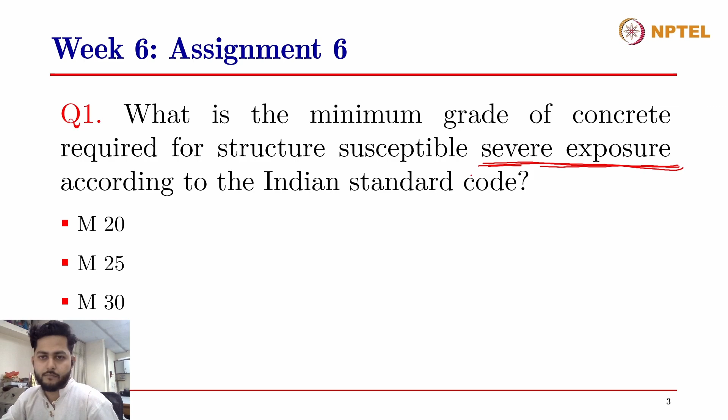Yes, does anyone of you know the answer to this question? All right, the correct answer to this question is M30 grade concrete.

This is table 5 of the Indian Standard IS 456 2000. Table 5 tells us about the minimum cement content, the maximum water to cement ratio, and minimum grade of concrete for different exposures of normal weight aggregates of 20 mm nominal maximum size. So 20 mm is the maximum size of aggregates allowed for the application of this table number 5.

And the exposure conditions are given from mild till extreme conditions. All these three parameters - the minimum cement content, maximum free water to cement ratio, and the minimum grade of concrete - have been listed out for plain concrete (PCC) and reinforced cement concrete (RCC).

And you can see that for severe exposure condition, the minimum grade of concrete for PCC is M20, and for structural concrete it has been mentioned as structure, so it is RC concrete, and that is M30 for severe exposure conditions. So the correct answer to this question is M30, right?

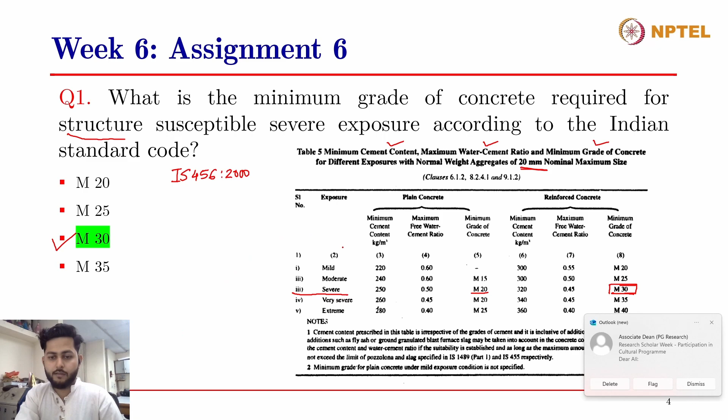Moving on to the second question. The second question goes: what is the target mean strength for M25 concrete as per the Indian standard? The standard deviation is given as 5 megapascals. So the grade of concrete is given.

Can you tell me what strength is mentioned in the grade of concrete? Which strength is mentioned as the grade of concrete? Yes, someone?

Divya, Vidya, do you want to answer this question? You need to calculate the target mean strength for M25 grade concrete, and the standard deviation is given as 5 megapascal.

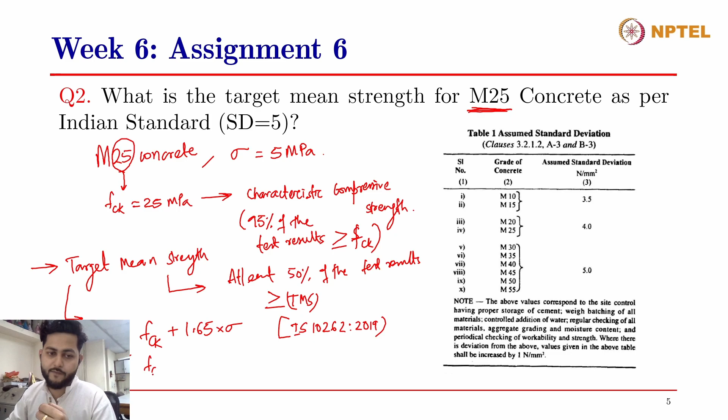In order to calculate the target mean strength, FC equals FCK plus 1.65 times sigma. This is as per the Indian Standard IS 10262 2019. So 10262 2009 had only the provision of 1.65 times sigma, but in the case of 10262 2019, it has been modified, and there are two ways of calculating this. One is by the standard deviation sigma, which I mentioned, and the other is by FCK plus X. X is a factor which takes into account both the standard deviation and the 1.65 factor as well.

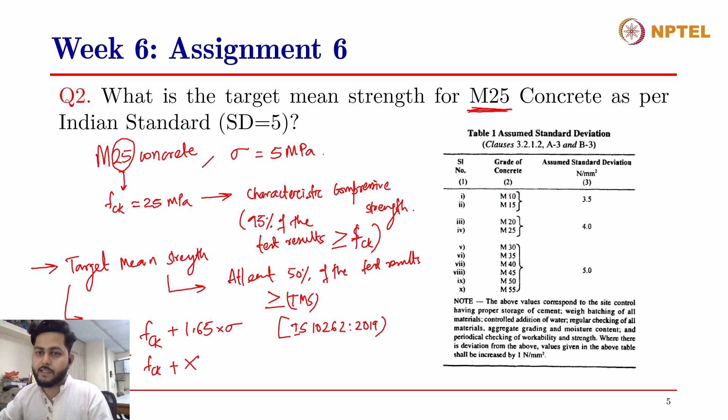So I have taken this table from 10262 2009, and here is the assumed standard deviation for different grades of concrete. Here it is mentioned that for M20 or M25 concrete, it is generally 4 megapascals, but in the given question, we have been given the sigma value as 5 megapascals. So we'll just go ahead with that.

So FC will be 25 plus 1.65 times 5, and the value will come out to be 33.25. The correct answer to this question is 33.25 megapascals. All right.

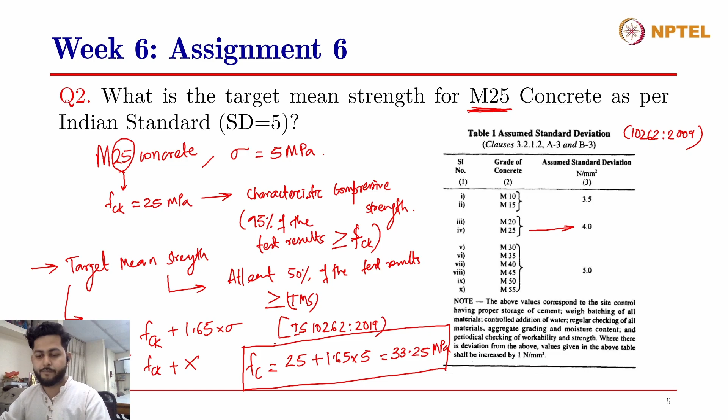Okay. Now for questions 3 to 6, you have been given a problem statement. The problem statement is: you have to design a concrete with 30% fly ash in cementitious material for a 28-day target mean strength of 35 megapascals.

The cement content, the water content, the fine aggregate content, and the coarse aggregate content for the control mix for the same 28-day target mean strength of 35 megapascals are given as 378 kgs, 200 kgs, 678 kgs, and 1155 kgs respectively. It is known that for the amount of fly ash mentioned, the water reduction is 15 kg per meter cube for the same workability.

We have also already studied this in the previous sessions. When we include fly ash in the mix, due to its spherical morphology, it produces a ball bearing effect, and therefore the workability is improved when we introduce fly ash in the mix. So, since the workability is improved, the other way to say it is for the same workability, we can reduce the water content. And therefore, it has been mentioned that for this 30% replacement of the cementitious material by fly ash, the water reduction can go up to 15 kgs per meter cube.

Assume a value of 0.3 for the K factor, and the reduction in wet density of concrete due to reduced water content and introduction of fly ash in the mix is 40 kgs per meter cube. So, with the introduction of fly ash and the reduction in water content, the whole bulk density or wet density, including the water, of the concrete after mixing is reduced by 40 kgs per meter cube. You have been given this data.

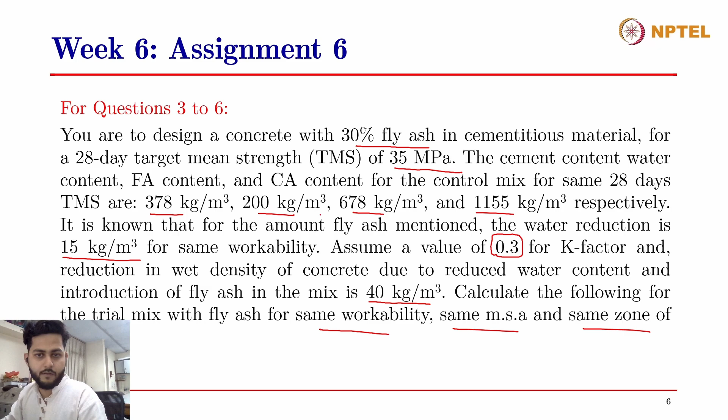I'll just write down the parameters. Till then, if you have the answer, just unmute yourself and speak. This is for the control mix. Cement is 378 kgs per meter cube. Water is 200 kgs per meter cube. Fine aggregate is 678 kgs per meter cube.

Coarse aggregate is 1155 kgs per meter cube.

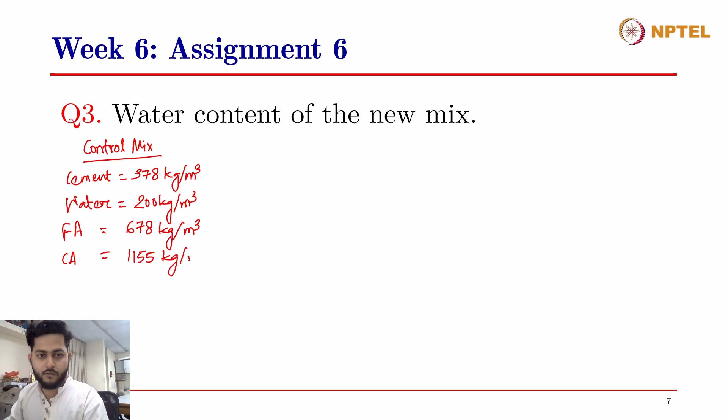Alright, and for the new mix, fly ash - I'm mentioning fly ash content as F dash equals 30% of cementitious material.

Water reduction is 15 kgs per meter cube. K factor is 0.3.

And reduction in wet density is 40 kgs per meter cube. Alright.

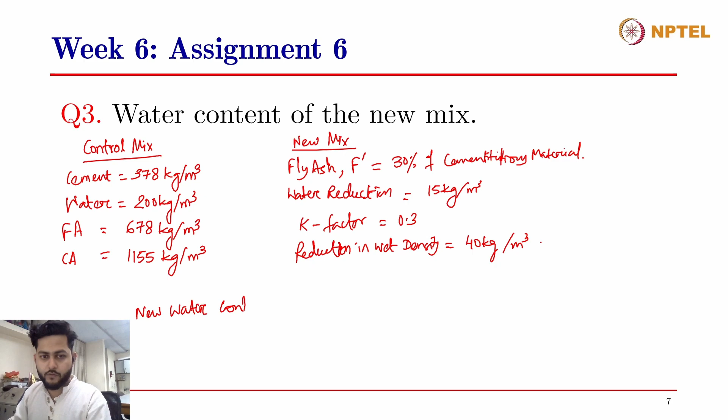Now the new water content is pretty straightforward. It is actually mentioned that due to the introduction of fly ash, we can reduce the water by 15 kgs. So W dash will be W minus 15 kgs per meter cube, so that will be 185 kg per meter cube. This is the first answer to this question - just have to reduce the water for the fly ash.

The second part of this question asks us the cement content of the new mix. How do we calculate it? We already know the water content, now we have to calculate the cement content. We know the fly ash content - it is 30% of the total cementitious material. And we know the cement content and the water content in the original mix. Now how do we calculate the cement content in the new mix?

For this part of the question, you have to focus on this term: same workability. You want to achieve the same workability in the original mix and the new mix. How do you calculate the cement content? Can somebody tell me the procedure to do it? How to proceed? We have been given this data set.

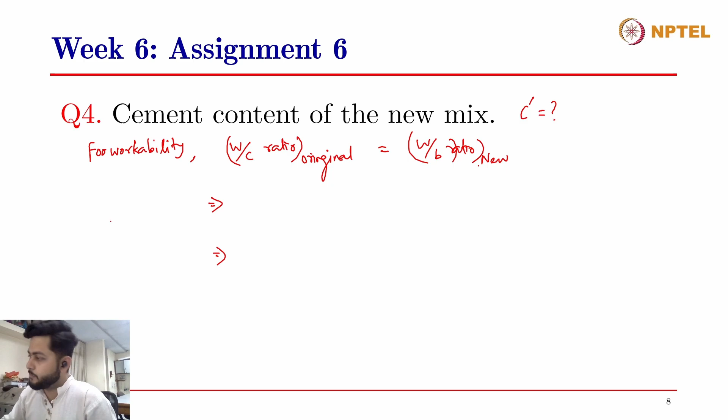So the water to cement ratio of the original mix can be equated with the effective water to binder ratio of the new mix. Now by effective, what I mean is this was 200 divided by 378 - we have to include the effective cementitious efficiency of the fly ash in this water to binder ratio. So W dash divided by C dash plus K times F dash, where K is the K factor, that is the effective cementitious efficiency of the fly ash, and this will vary from fly ash to fly ash.

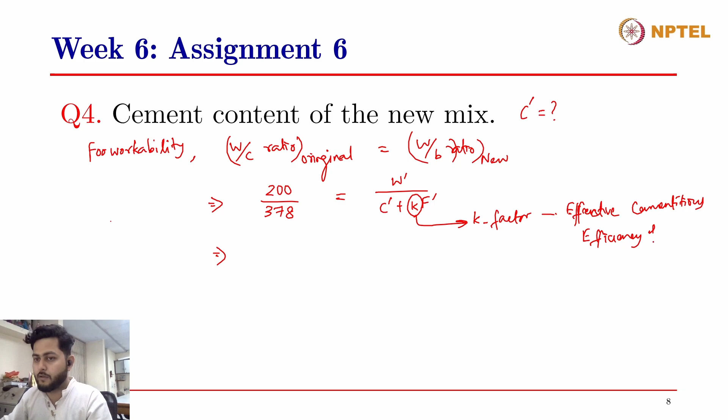And we have been given K as 0.3, and W dash equals 185 kgs per meter cube. We can substitute that in the equation, and then we find: C dash plus 0.3 F dash will give us 349.65. So that will be equation 1.

And equation 2 will come from the fly ash F dash content in the total cementitious material content. So F dash divided by C dash plus F dash equals 0.3 - 30% replacement in the total cementitious materials content. So that will give us 0.3 C dash minus 0.7 F dash equals 0. Now if I just divide all of it by 0.3, you'll get C dash minus 2.33 F dash equals 0. So this is equation 2.

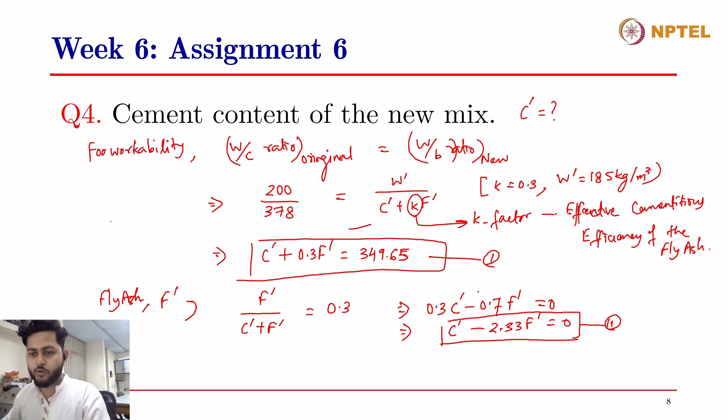Just move to the next - this question 4 was also related to this part, so I'm using this slide as well, because we have to calculate the fly ash content and the cement content. From these two equations, equation 1 and 2, we'll be able to calculate both the fly ash content and the cement content.

From equation 1 and 2, we can calculate as 0.3 F dash if we add both of the equations. Plus 2.33 F dash equals 349.65. From that, we can calculate F dash equals 132.94 kgs per meter cube, so we'll approximate it to 133 kgs per meter cube.

So fly ash content is this much in the mix. And since we know the fly ash content, we can put it in equation 2 and find out the total cement content. Cement content will be 2.33 times the fly ash content, which gives us 309.75 kgs per meter cube, approximated to 310 kgs per meter cube. So this is the cement content in the new mix.

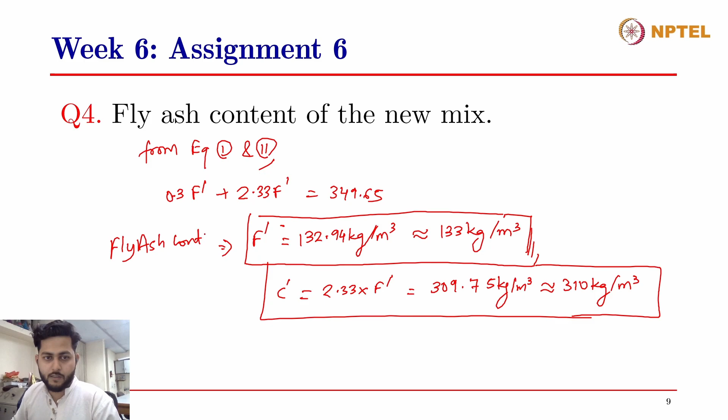I'll just mention it over here: fly ash content in new mix, and this is the cement content. 133 kgs per meter cube and 310 kgs per meter cube. Hope that is clear to you.

So for calculating the cement content and the fly ash content, you need to know that the workability is same.

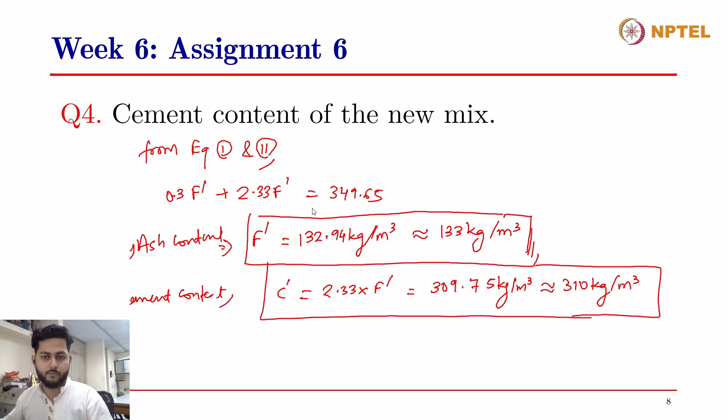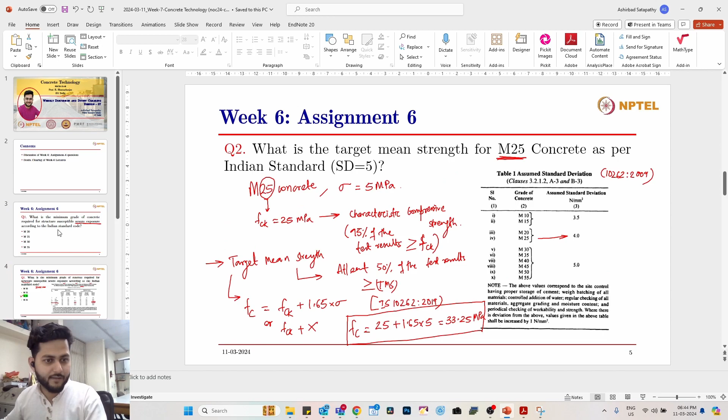Oh, did not get it. Somehow it did not erase properly. I guess, do we have it on here? No, none of it got written. Oh, I'll have to write it again then. I'm so sorry, this probably malfunctioned or something happened, and none of it is there on the slides.

This is question 4, this is 5, and this is question 6.

Okay, I'll just quickly write down everything again because we missed it. So for the same workability, water to cement ratio original can be equated with the water to binder ratio in the new mix, right? So that will be 200 divided by 378 equals water dash, which is the new water content, divided by C dash, which is the new cement content, plus K times, which is the K factor, F dash, right?

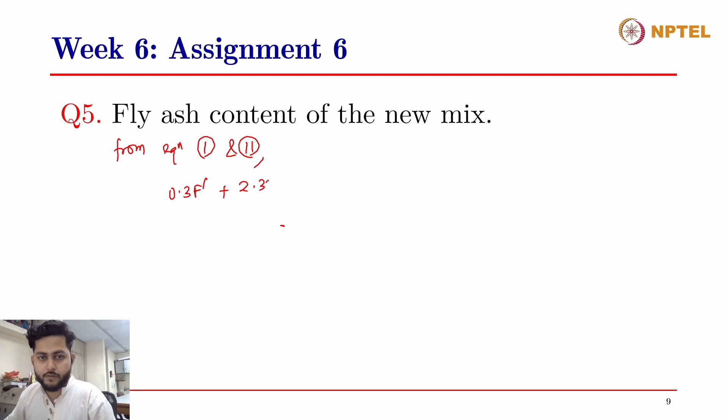From equations 1 and 2, we get that 0.3 times F dash plus 2.33 F dash will give us 349.65, and therefore F dash content will be 132.94 kgs, which can be approximated to 133 kgs per meter cube of concrete, right?

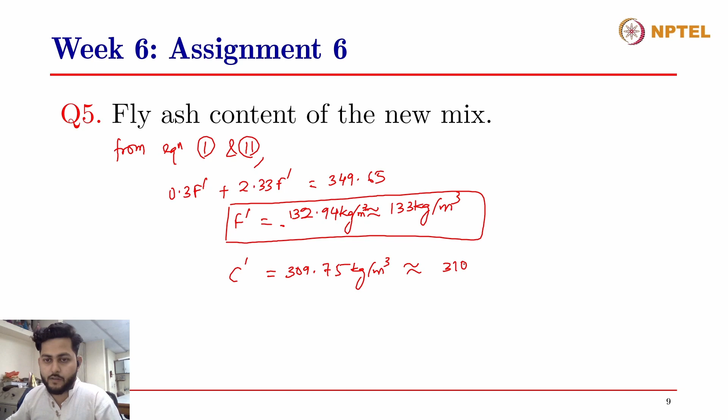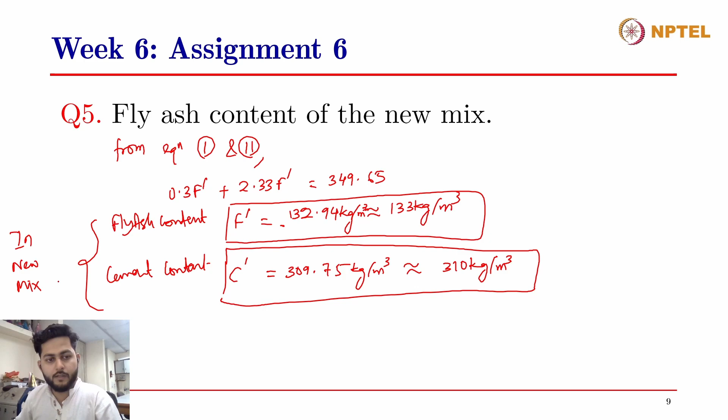Now F dash is equal to 133 kgs per meter cube of concrete, and from that we can calculate the C dash value as 309.75 kgs per meter cube of concrete, approximated to 310 kgs per meter cube of concrete. So that is the value of cement content and the fly ash content in the new mix. This is the fly ash content, and that is the cement content in new mix, right? 133 and 310.

Moving on to the sixth question, we have to calculate the fine aggregate content of the new mix. Now, how do you calculate the fine aggregate? You have already found out the water content in the new mix, the cement content and the fly ash content, the total cementitious materials content in the new mix. You know all the weight values of all the contents of the original mix. Now, how do you calculate the aggregate content in the new mix? Not just for this question, how do we calculate the aggregate content once we decide the water content and the cement content?

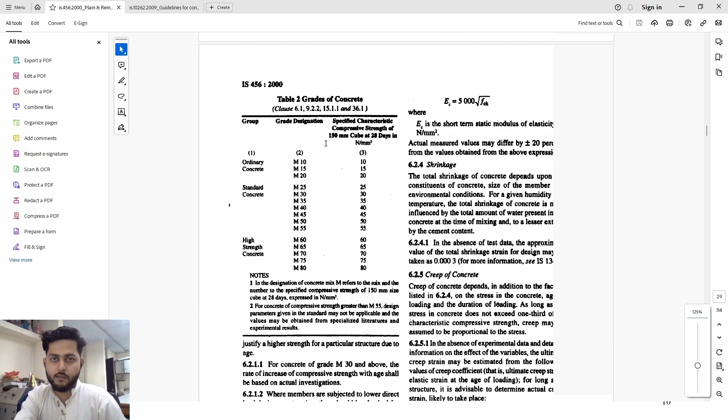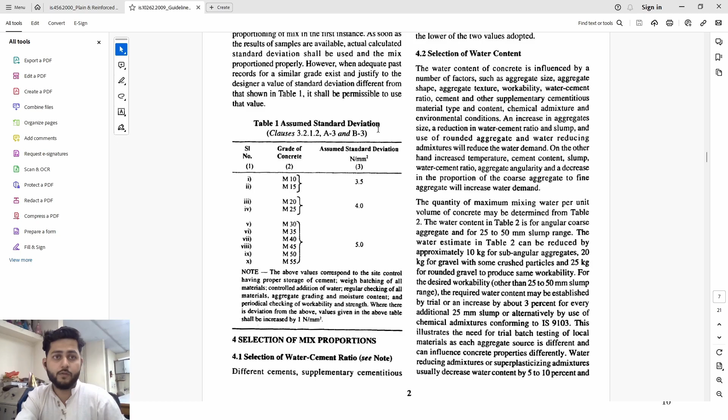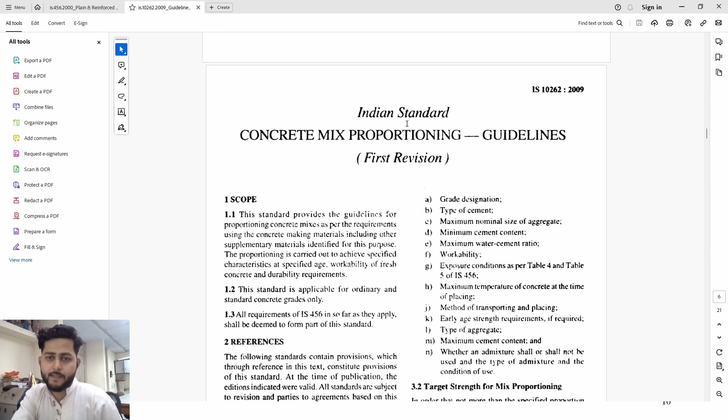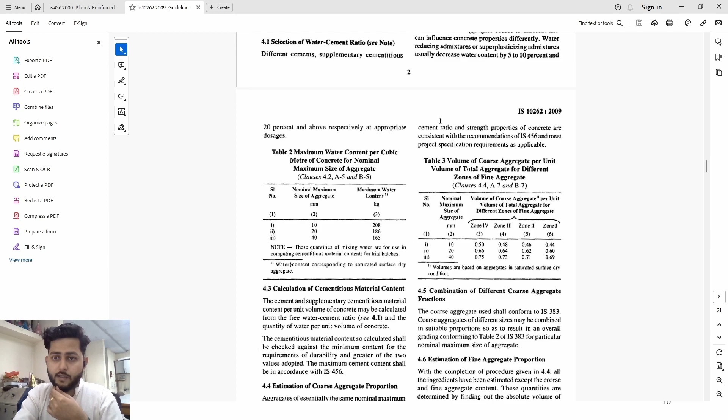We first decide on a coarse aggregate to total aggregate ratio, right? So from the Indian Standard Code, I'll just check if it is open on my desktop right now. Yeah, it is here. So from the Indian Standard Code IS 456, we can first calculate the C by A ratio—not this one. Yeah, this is the mix design code, not IS 456. This is from the mix design code IS 10262:2009, and I have the 2009 version of it. If you have the 2019 version, the newer one, you can also use that. At least this value is same in the new standards. In order to decide the volume of coarse aggregate, you have to go to table 3 of the Indian Standard IS 10262.

This is the volume of coarse aggregate per unit volume of total aggregate, also called the C by A ratio, coarse aggregate to total aggregate ratio. For different zones of fine aggregate - Zone 4, Zone 3, Zone 2, Zone 1 - and the nominal maximum size of aggregate, it is mentioned. So in order to calculate the coarse aggregate to total aggregate ratio, you need to know two values: the gradation of your sand and the zone in which it falls, and the nominal maximum size of aggregate in your given mix. Based on that, you'll be able to calculate it.

Once you know the coarse aggregate to total aggregate ratio, you have to conserve the volume. By volume conservation, I mean you calculate the total weight proportions of each constituent in your concrete mix for 1 meter cube volume of concrete. You already know the water content and cement content, and the specific gravities of all materials - cement, fine aggregate, coarse aggregate, water, and any chemical admixtures. Once you know all the specific gravities, you can calculate the volume of aggregates by conserving the volume to 1 meter cube.

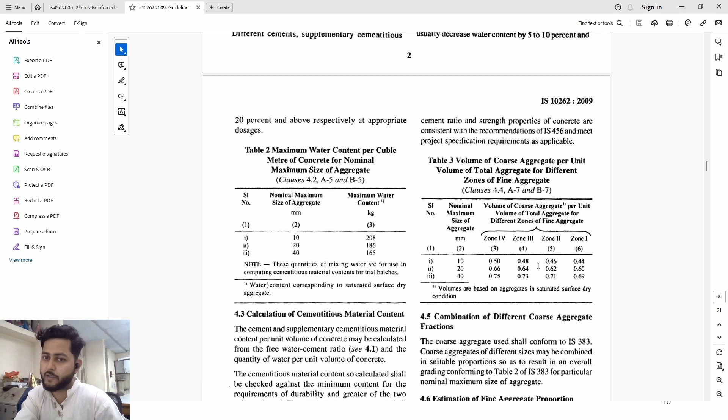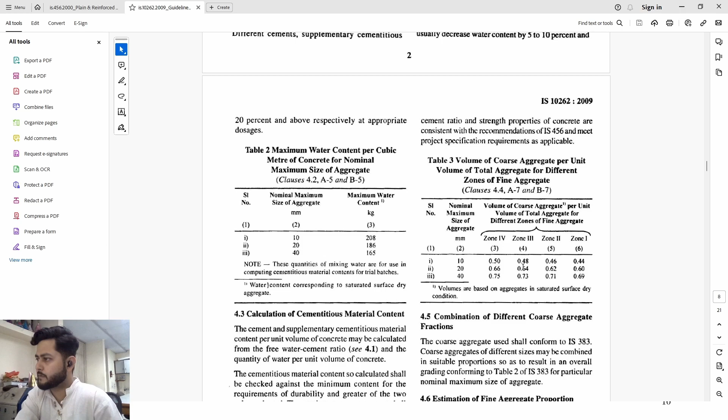Once you calculate the volume of total aggregate, and from the value of volume of coarse aggregate to total aggregate ratio - let's say 0.64 or something - you'll be able to calculate the volume of coarse aggregate and fine aggregate in the total aggregate mix. Since you know the specific gravities of both types of aggregates, you'll be able to calculate the weight content of each aggregate type. This is the generic procedure to follow once you've decided the water content and cement content, to calculate all other weight proportions in the concrete mixture.

Now if we come to our given question, how do you decide that? How do you calculate the fine aggregate content? We have not been given the coarse aggregate to total aggregate ratio. We do not know the nominal maximum size of aggregate or the zone of sand. But what we have been told is that the maximum nominal size of aggregate, MSA, is same as the original mix, and the zone of sand is same as the original mix.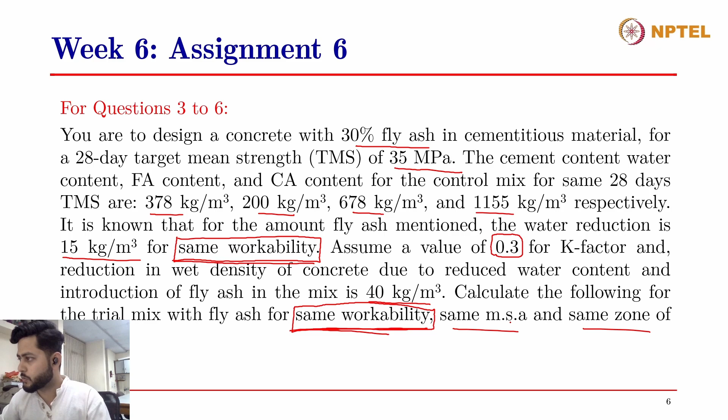Now if the MSA and the zone of sand are same as the original mix, then the coarse aggregate to total aggregate ratio of the new mix will also be the same as the original mix, because this value depends on these two parameters. So we know that the coarse aggregate to total aggregate ratio is the same as that of the original mix, and we'll start from there in this question.

Let me just write it down: MSA new is equal to MSA original. Similarly, zone of sand new is same as original.

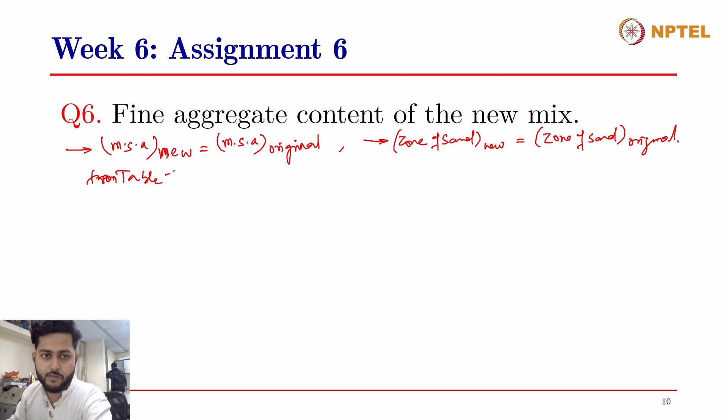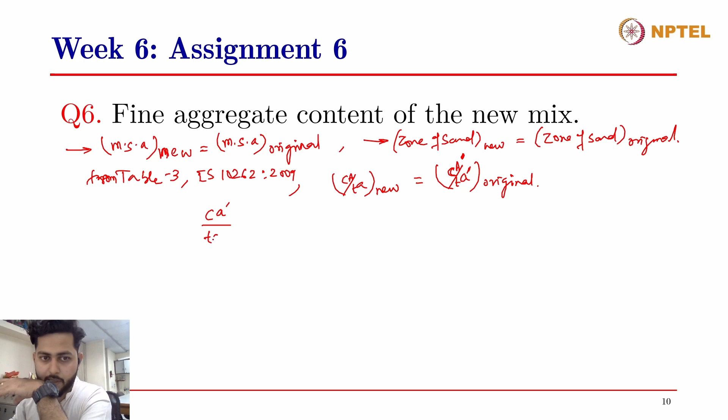So from Table 3 of IS 10262 2009, CA by TA ratio of new is also equal to CA by TA ratio of the original, and this C is coarse aggregate. So I'll mention it as CA by TA - coarse aggregate to total aggregate ratio - same as that of original. Now I'll write CA dash by TA dash. This is CA and TA for the original, and CA dash, TA dash for the new mix.

So we have our first equation: CA dash divided by TA dash equals the same coarse aggregate to total aggregate ratio of the old or original mix. And how much is that? The coarse aggregate was 1155 and fine aggregate was 678. So we'll move ahead with that: 1155 divided by 1155 plus 678.

And that will be how much? This value will be... Now we know that total aggregate equals CA dash plus FA dash, the fine aggregate in the new mix. So I'll break it down like this: CA dash plus FA dash equals this value, and from this equation, if we substitute all of that, we'll get the first equation as 678 CA dash minus 1155 FA dash equals 0. If we do the calculation, you'll arrive at this expression, and this is the first equation.

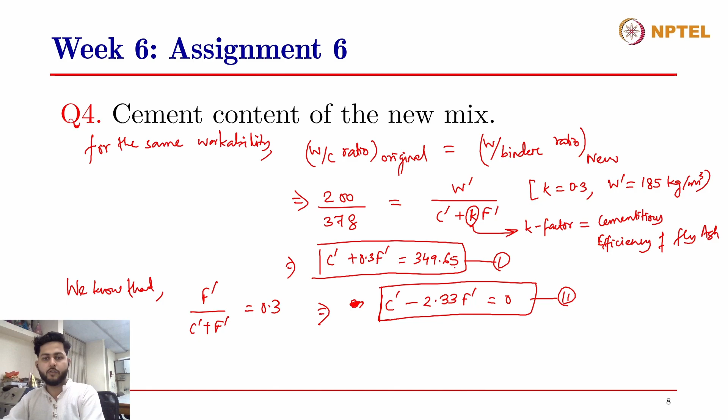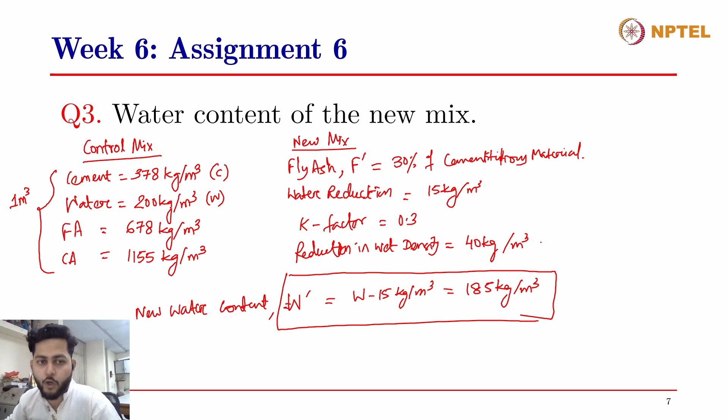Let's look at this. We have the total weight proportions of the control mix, and we know that the wet density is reduced by 40 kg per meter cube in the new mix. So this weight proportion in the control mix, this is for what volume of concrete? For 1 meter cube of concrete, right? Everything is per meter cube. So if we add up the total weight of all the constituents of the control mix and divide it by 1 meter cube, we'll get the wet density of the control mix. Yes, the combined weight of all the constituents divided by the volume of the mix, which is 1 meter cube, will give us the wet density of the control mix.

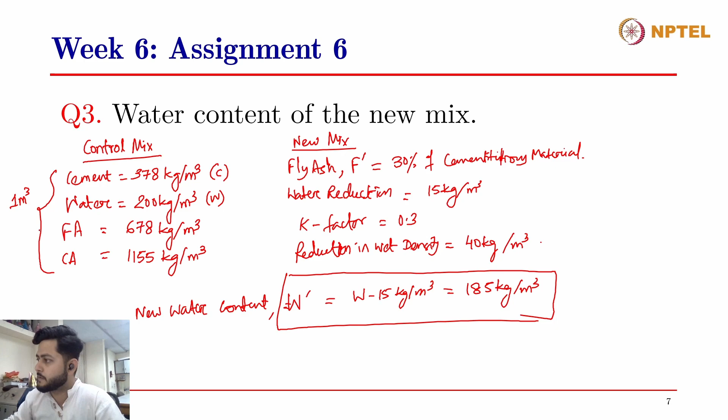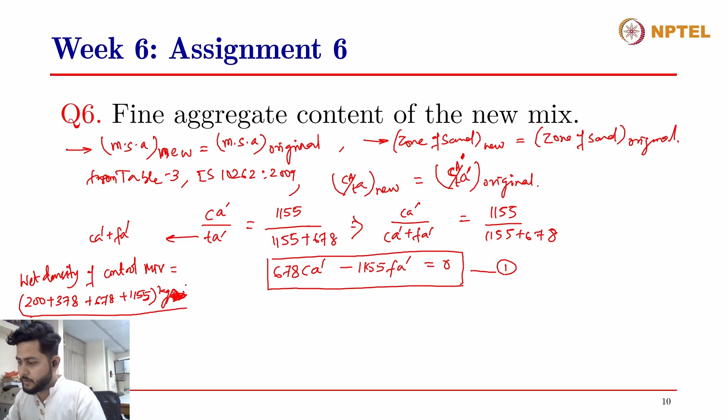So we'll do that. I'll write over here: wet density of control mix equals 200 water... 378 cement plus 678 fine aggregate plus 1155 coarse aggregate, kg per meter cube, divided by 1 meter cube. That will give us total kgs divided by 1 meter cube, and the sum of this is 2411 kgs per meter cube. So that is the wet density of the control mix. Just put a bar over here.

Now we know that the new wet density is 2411 minus 40 kgs per meter cube. So that will give us 2371 kgs per meter cube. And we already know the water content, the fly ash content, the cement content. So if we subtract that, then the rest of the weight proportion will be for the total aggregates.

So that means I'll just write this expression: Ca dash plus Fa dash, which is the total aggregate, will be equal to 2371 minus water content 185, fly ash content 133, and cement content 310. So this will give us the total aggregate weight. So that is another expression, Ca dash plus Fa dash equals 1743. This is equation 2.

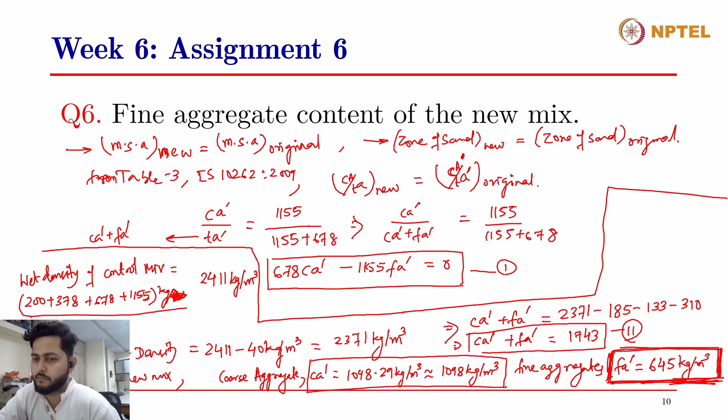This is how you're going to calculate when you're substituting some part of the cementitious material in your concrete using fly ash or any other supplementary cementitious material. Now this is a manual way of doing it. You can automate it in an Excel sheet or any other software, and this can be done in seconds. So this is the manual way to calculate the weight proportions, but generally on sites we do it using Excel sheets.